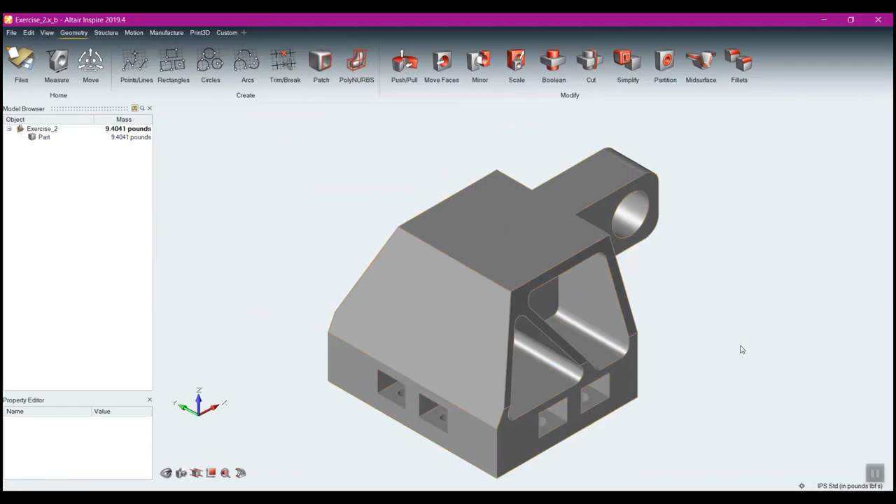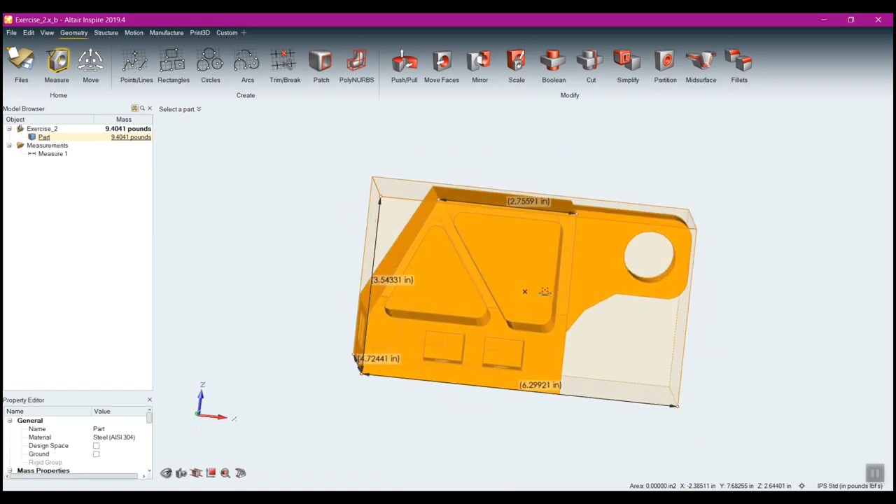I get the file in here like this, so I'll take a quick look around at it. Once I have it in there, I can do things like measure. If I want to measure a specific distance, I click on that and click 2 points and it will provide me that distance, or I can grab this box here, click the part, and it will create a bounding box and give me the overall dimensions for that box, so I can get an idea of the size of my part.

To get out of any function within Inspire, you simply right click and then take your mouse and pass it through this little checkbox and you'll exit the function.

Now, if I come over here, you see my measurement is saved. I'm just going to right click on this and delete it because I don't need that measurement anymore. But I'll take a look at my part, and you'll see my part says it's 9.4041 pounds.

How does it know that? Well, Inspire is going to automatically assign a material to that. And the material by default that it assigns is the material at the very top of our material library, which is steel AISI 304. We automatically assign a material so we can guarantee that everything is analytical.

But one of the first things I want to do when I do an analysis is make sure I assign an appropriate material. This part happens to be an aircraft door hinge bracket, so I'm going to make this out of aluminum.

To change the material, I can do that a couple of different ways. I can come here to the part and select from my list here. My personal favorite way is to right click on the part and select material. When I come down here, I can see a list of all of these different materials, all the way from steel AISI 304, down through plastic nylon. These are materials included in the software in our material library.

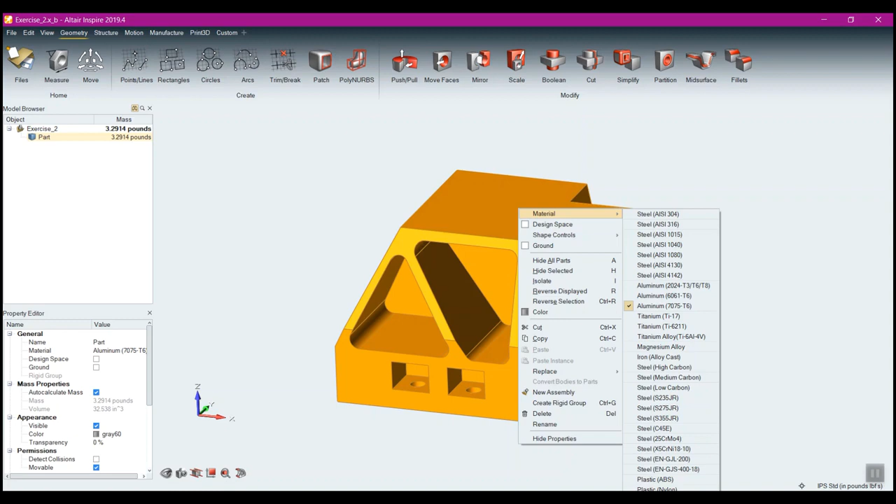But you may have noticed down at the bottom here, I've actually got a material called Douglas fir. I was doing some work on a part that I wanted made out of wood, so this is a custom material that I defined.

It's very easy to add a material to Inspire. I just come to my structure tab here, my structure ribbon, and come to materials. Once I do that, it's going to open this up. I've got 3 different tabs here. The first one is parts, which lists all of the parts in my model and their associated material. I only have the one part, and its material, of course, is 7075 T6 aluminum.

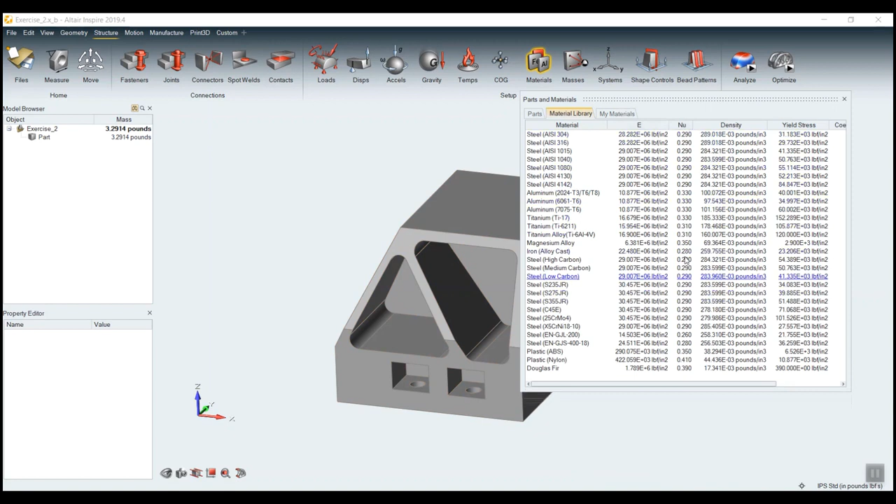Material library allows me to see all of the materials in my library currently and their definitions. And then my materials is where I can add my own materials.

You see my Douglas fir there, but I can click the plus and we'll add a special material here. It defaults to material 1, but I can click on that and rename it to whatever I want. So we'll call that... we'll call it something unique. Eric's material. There we go.

Now I just need to enter the values for that material. Since Inspire is a linear static analysis, we do require it be a linear material, so we're going to deal strictly within the linear range, defining the stiffness by the Young's modulus, the Poisson's ratio, and then the density so the mass can be calculated, the yield stress for analysis purposes, and the coefficient of thermal expansion, which is used if we're going to be using heat as a load.

Right now, the material does have to be an isotropic, homogeneous material. Unfortunately, we can't, as of yet, support non-isotropic materials, composites, that sort of stuff. That isn't to say people aren't doing analysis on composites using Inspire, but they're kind of homogenizing the material, taking the entire layup and coming up with an equivalent material specification.

You'll also notice here that my Young's modulus, which is a pressure, is being referenced in pounds force per square inch. That's being defined down here by my units. Units customarily have always been kind of a difficult thing when it comes to analysis. We've tried to make them as easy and seamless as possible within Inspire.

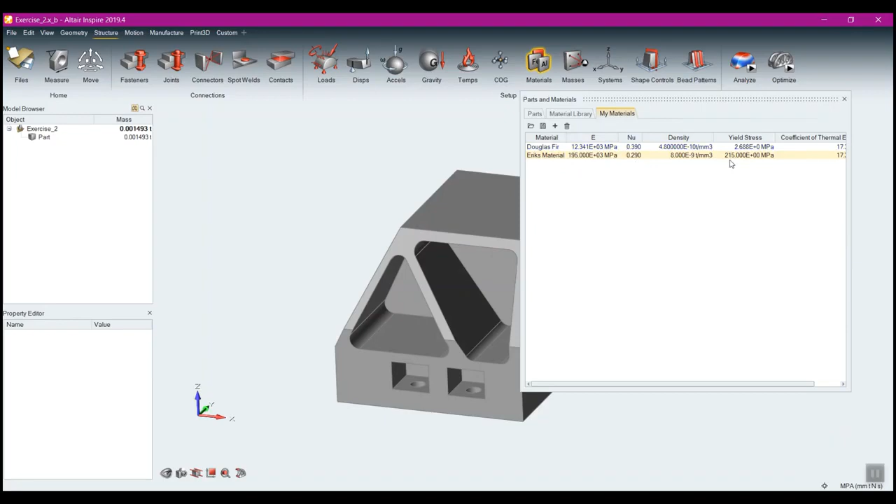I click that, and you see automatically my specifications have all adjusted to that new unit scheme. And if I come to my part here and take that same measurement I had before, you can see now it's showing as 70 millimeters.

The great thing about units within Inspire is they are entirely seamless. I can switch units at any point in time, countless times through working on the model, setting it up, analyzing it, post-processing it, and nothing happens to the model other than it adjusts to the new units. All forces, measurements, and material definitions will automatically update to the new units, so I don't have to worry about messing up my model. I can now just reference it in the new unit scheme. So units are truly seamless within Inspire.

Now I could delete that measurement, or as with pretty much everything with Inspire, it does have a display state, so I can click that and turn it off, and that still exists. It's just not being shown anymore.

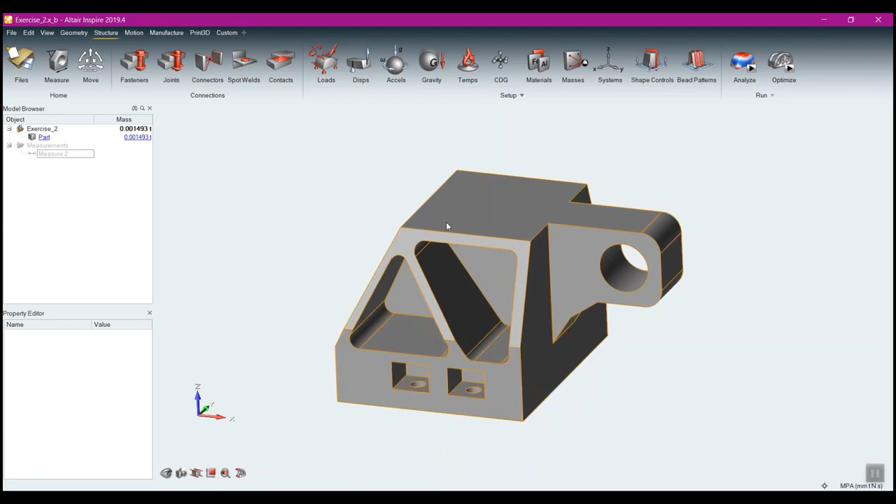So now I've defined my material, and you can see it's being shown in metric tons, so it's a very small number. Let me switch it back to English units here. So 3.2914 pounds. I want to run an analysis on this, a relatively simple structural analysis.

To be able to do this, I need to constrain it somehow or hold it in place. So I'm going to come back to my structure, come to my loads icon, which has a number of multifunction selections on it, and down here at the bottom we have the supports. You'll notice the icons within Inspire are large, somewhat colorful, and very descriptive as to what they do, achieved by combining functions through this multifunction idea. You can see my supports here are supporting this little block, so you can see what they're meant for.

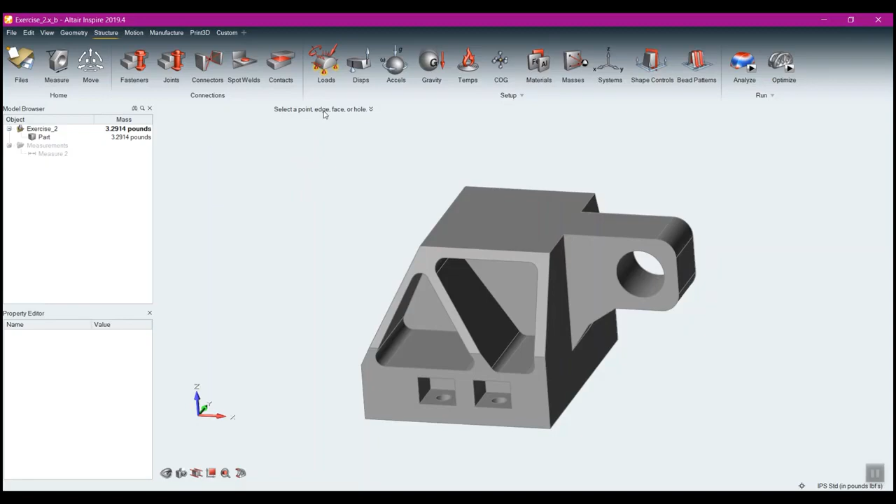When I select that, my pointer gets a little support modifier on it, and now I can select either a point, an edge, a face, or a hole. If I select a face, it doesn't matter where I click, the icon appears wherever I clicked, but the fact that the entire face turns red is what's important - it means the entire face is being held in place with an encastre constraint.

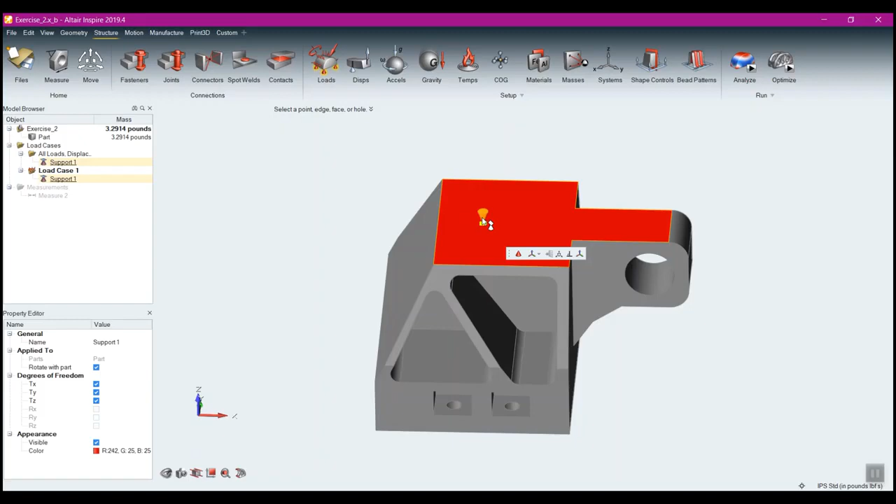There are times, though, where I don't want to fully hold something in place - I want to free up a direction or two. So I can just double click on that, and now you'll see I get these little pointers. If I select one of them, it turns green, and now when I right click to get out of this edit, my icon has modified to include these roller wheels, which show the direction it is now free to move.

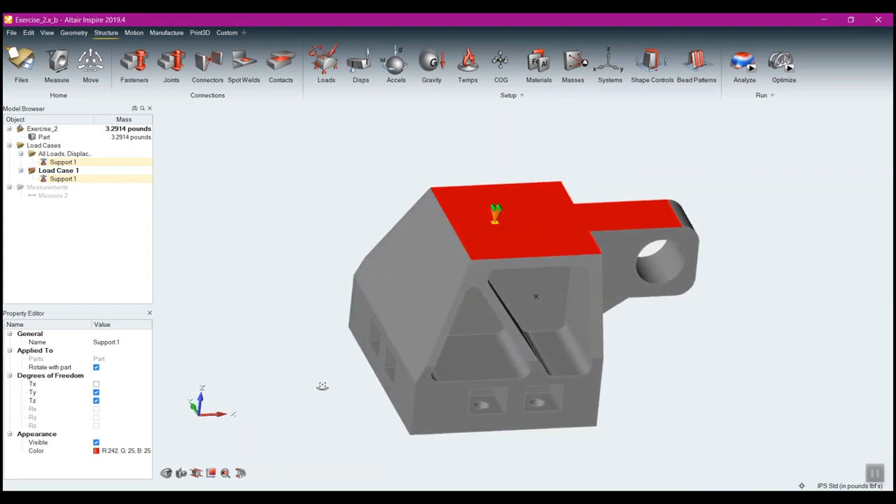So it is now free to move in what amounts to - what's that? Looks like the x-axis there. So now it's free to move in the x-axis.

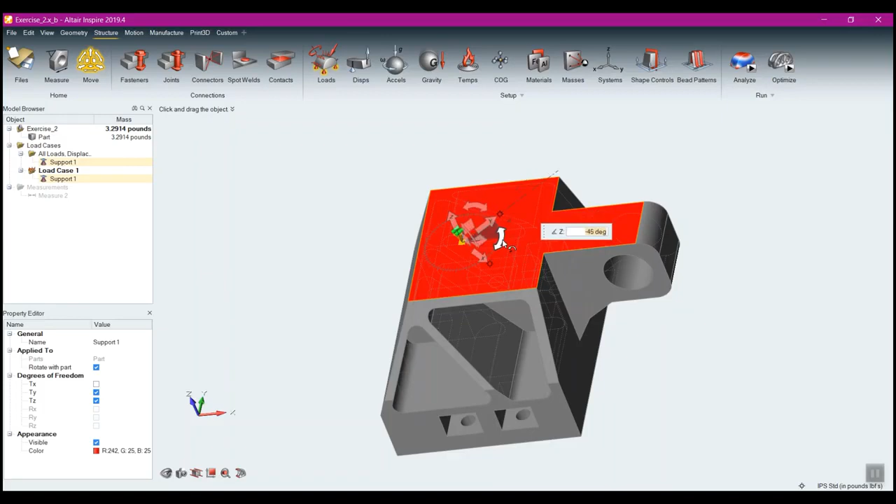These rollers are actually pointing in the direction, to the point that I can even come here and double click on this and select this little move support. I get my little triad with my spinners and translation, and if I spin that, I can spin it manually 5 degrees at a time, or I can type in a value. Now I'm 45 degrees off of the x-axis, and my little rollers are now pointing in that direction, so it truly is showing me the direction that is freed up.

If I double click on it again, I can select this one, and now I get a little caster ball showing that this is now constrained out of plane, but it can freely move in the plane. If I were to select the third one, it goes to a faded view because that is no longer doing anything. I can turn those back off again, and now I've got a fully encastre constraint.

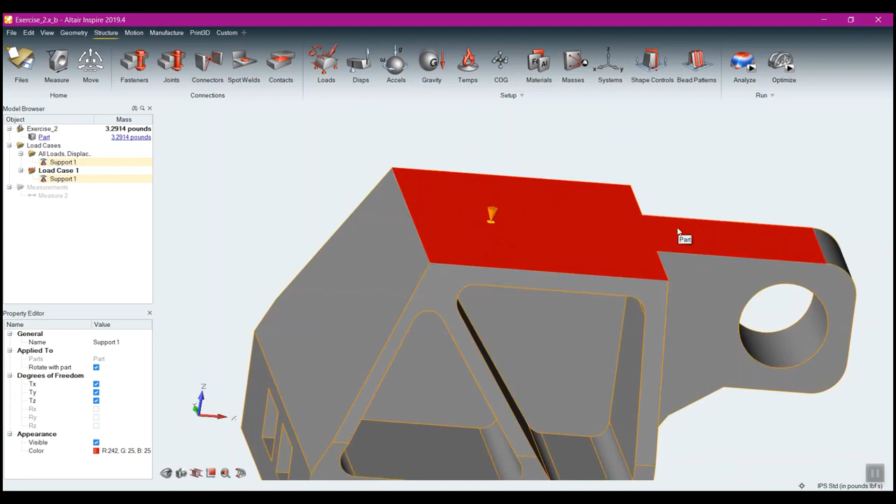In this case, though, I don't want to constrain that face. What I actually want to constrain are these bolt holes down here. This bracket is mounted onto the aircraft like this, and the door hinge goes through here, so I'm going to simulate mounting it onto the aircraft by constraining these holes.

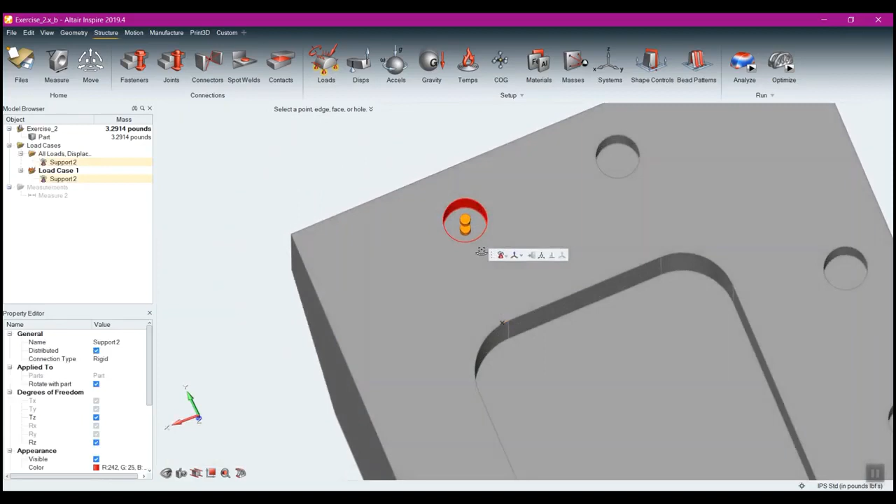So I'll come back to my constraint, select my hole, and I get a different looking constraint because Inspire does recognize that this is a hole, and recognizes that holes have some unique features when it comes to constraining things, because most of the time when we're constraining at a hole, we're putting a bolt or a pin through there.

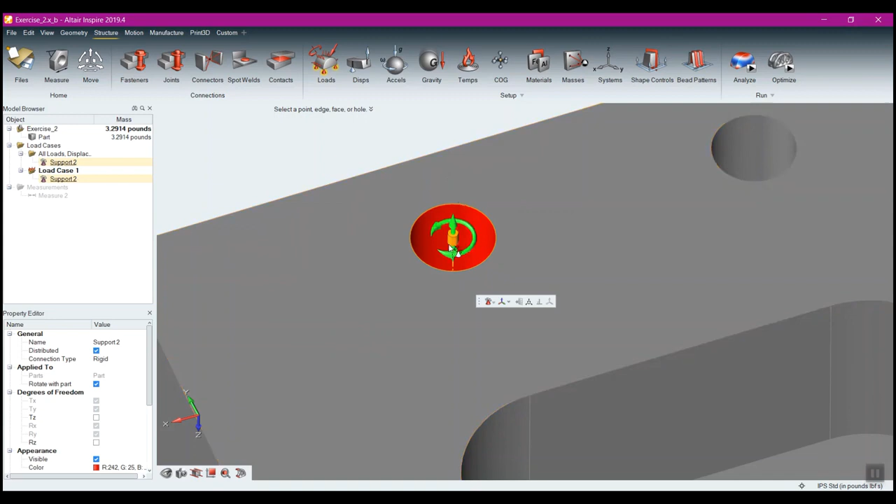So now if I double click this, I get slightly different features that I can free up. I get this kind of partial circle going around there, which if I select it turns green, and now that's saying this part can rotate around the axis or move up and down or along the axis, but it will always be constrained normal to the axis, acting like a bolt or a pin is in there.

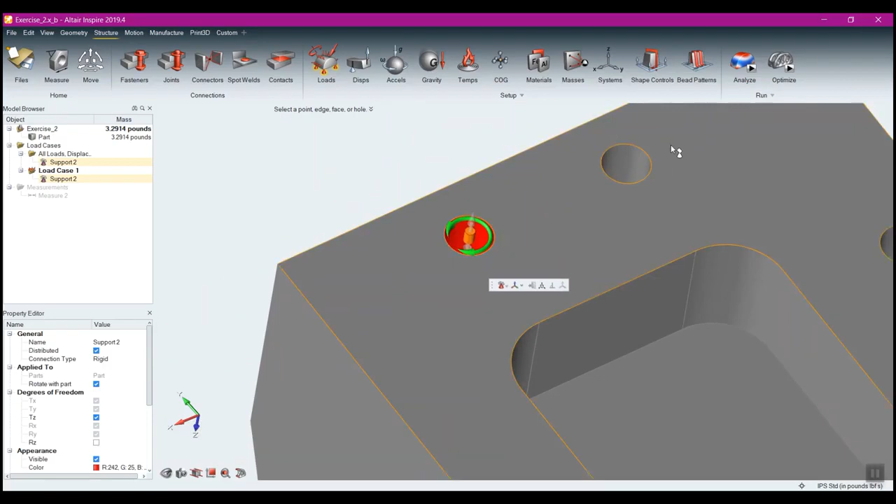Now, as a little trick here, I'm going to create all 6 of these. If I create one and then modify it while still in the constraint function... let me try that one more time.

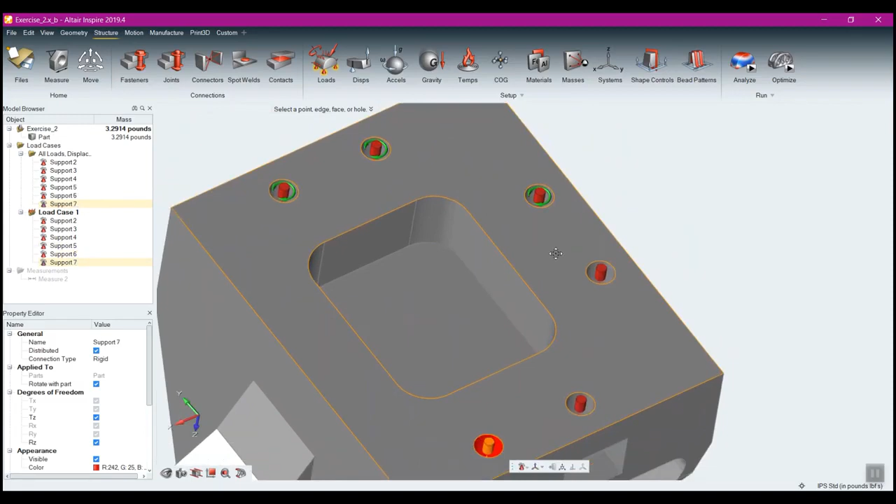Well, hey, sometimes even in demonstrations things don't work quite the way we wanted them to, but that's okay. So now I've created the constraints here. I actually didn't even want these freed up like that, I did want them fully constrained. But in the past it has copied that. Maybe that's a feature that's no longer there, but that's okay.

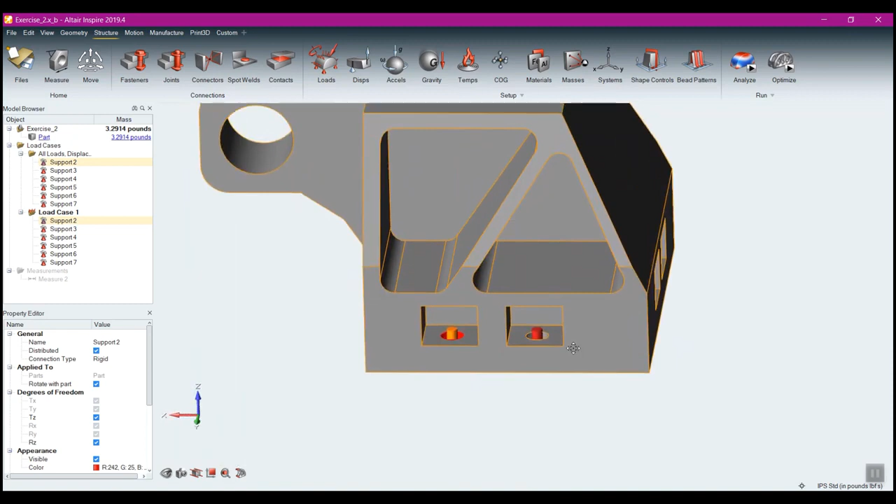So now I have my constraints in there, the part is held in place, and the next thing I want to do is add a force to it. I'm going to select my force, and again I can put a force on an edge, a face, a hole, or a point. If I select a face again, you see it says 1 pound force, and that entire face is highlighted in red.

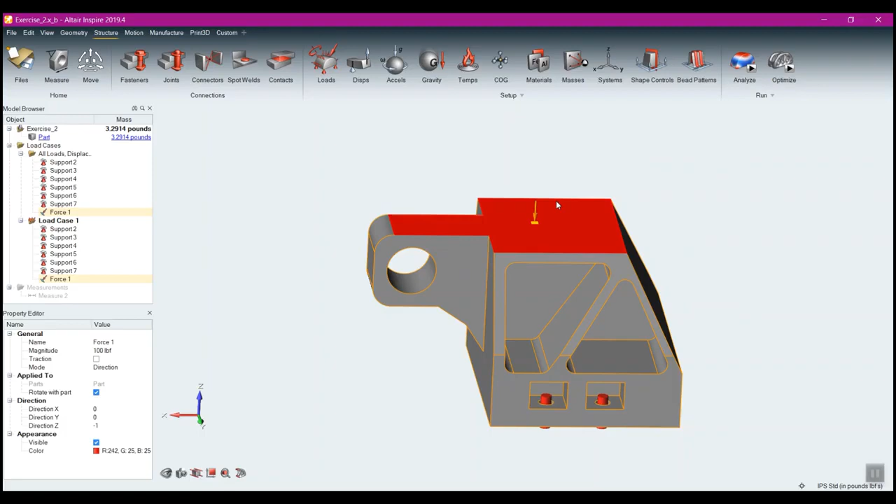That means this 1 pound force is going to be evenly distributed across that entire face. If I want to change it, I could say 100, and now it's 100 pounds force. You'll see when I highlight this, it tells me force 1 equals 100 pounds force, and then it even tells me what the equivalent pressure would be based upon the area of the face it's applied to.

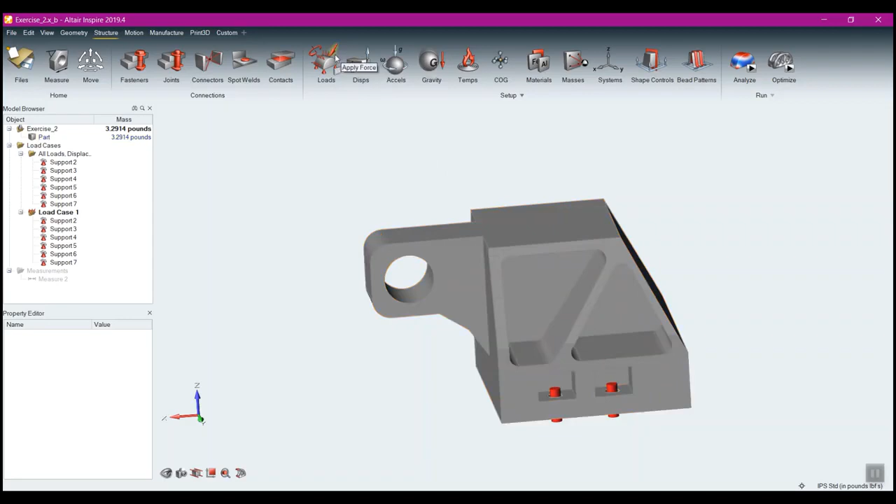So I don't have to worry about the placement on it. I just click on it and get an even dispersal and even spreading of that force across the entire feature, and that works also with lines. Points, of course, it doesn't spread it, it's just a point load, but it would on a line, or on a hole. If I apply it to the hole, which is what I want to actually do, I'm going to select that hole right there. It is now going to connect that to the entire inner cylinder of that hole.

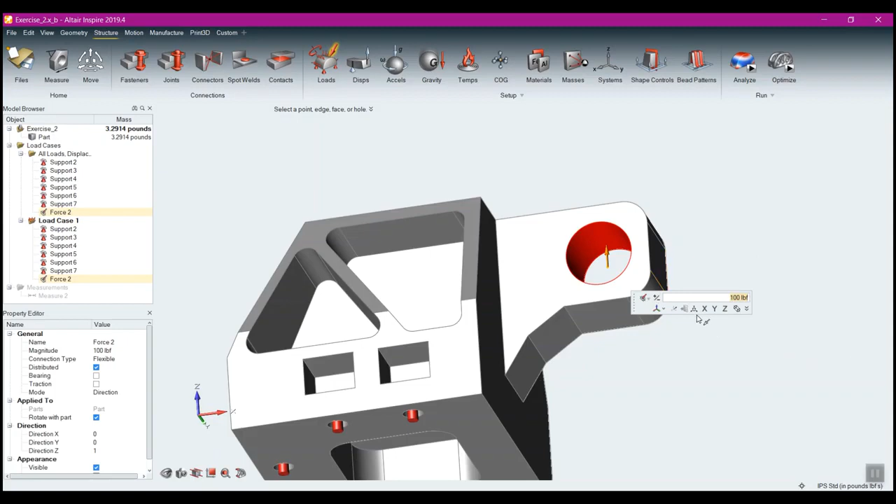And whatever direction I select here, either X, Y, or Z, it will point in that direction, and then I can do plus or minus. Just like I could with my constraints, I can come here and manipulate the direction with my little manipulators here.

Or if I happen to know the vector components of my force, I can put those in here. You'll see these are the components of a unit vector, but it does not have to be in unit vector form. I could say 3, 4, 5, and that will work perfectly fine, and that does not affect the magnitude. These are independent - this is just a direction vector, and I can specify the magnitude separately.

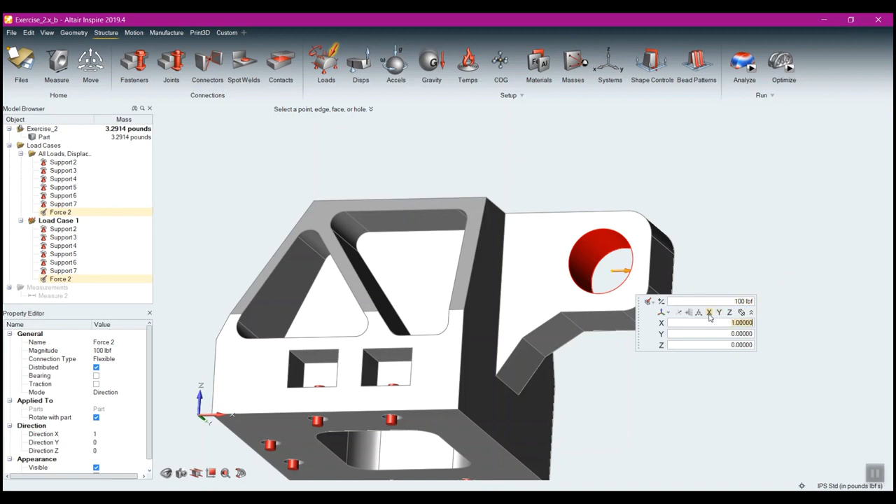Now here's a nifty thing. Let me first put this in the direction that I want. We'll put it in the x-axis. Nope, sorry, let's put it in the y-axis negative. There we go.

So right now it's 100 pounds force, and if I were to type in, say, 2,000, it would be 2,000 pounds force. But say, for instance, I happen to know that 2,000 newtons of force are being applied to this, and I don't have my calculator handy to do a quick conversion on it.

I can type in 2,000, and as we just saw, if I clicked enter, it would be 2,000 pounds force. But if I type the unit abbreviation N for newtons and click enter, it automatically updates that to whatever unit scheme or unit system I'm in. So I can even enter values in another unit system and it will automatically convert them, as long as I include the abbreviation for that.

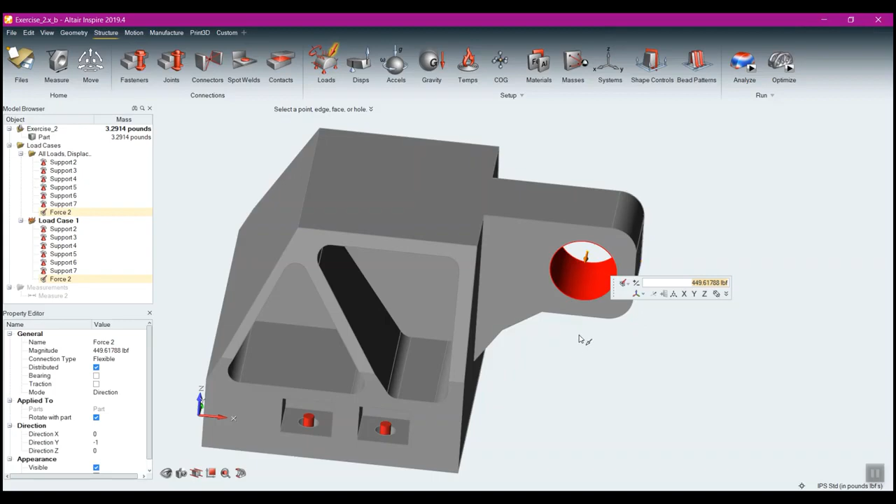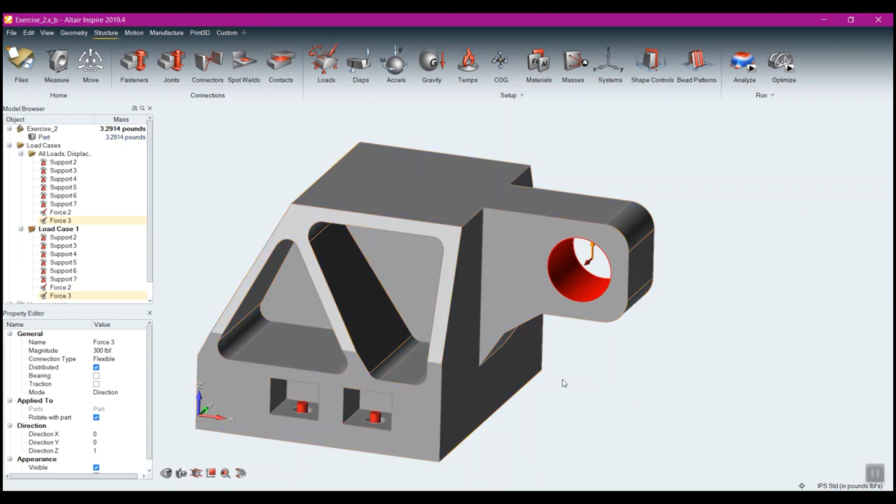Now I want another situation here, I want to study something else. So I'm going to put another force in here, and we'll have this one act in the z-axis, and we'll make this, I don't know, 300 pounds force. Really doesn't matter what value I put in there right now - of course I would want to know exactly what the values are for my load when I set up my analysis, but we're just doing a quick study here of how to set it up.

So now I've got these two forces: a 449 pound force acting this way, a 300 pound force acting up. The problem I have is both of those forces are going to act together, and I want to make sure these are two different scenarios that I'm studying.

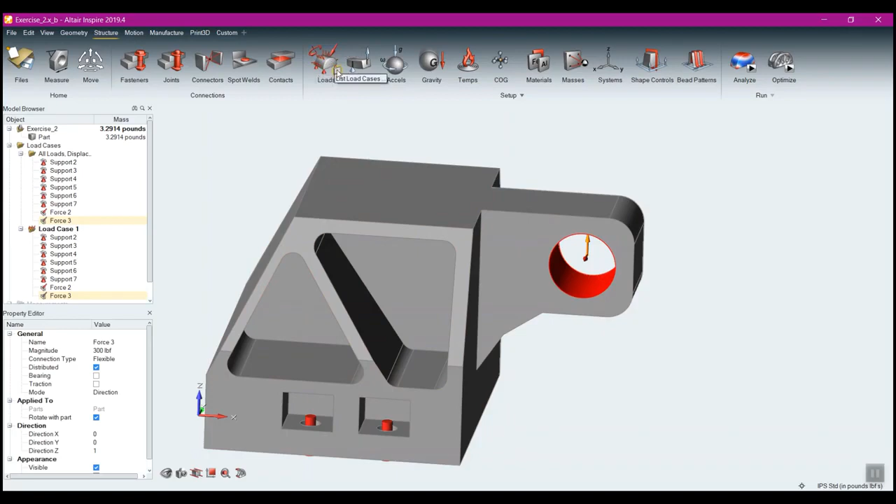So I can come up here, and if I highlight my force or load icon again, I get this list of load cases. I can add a new one, and then just pick buffet style what I want from there. So we'll say this one will be force 3, this will be force 2, and now I have two entirely separate load cases. I'll get results for both of them, run separately, but they'll run together in my analysis. I don't have to run two analyses, and I can add as many of these as I want.

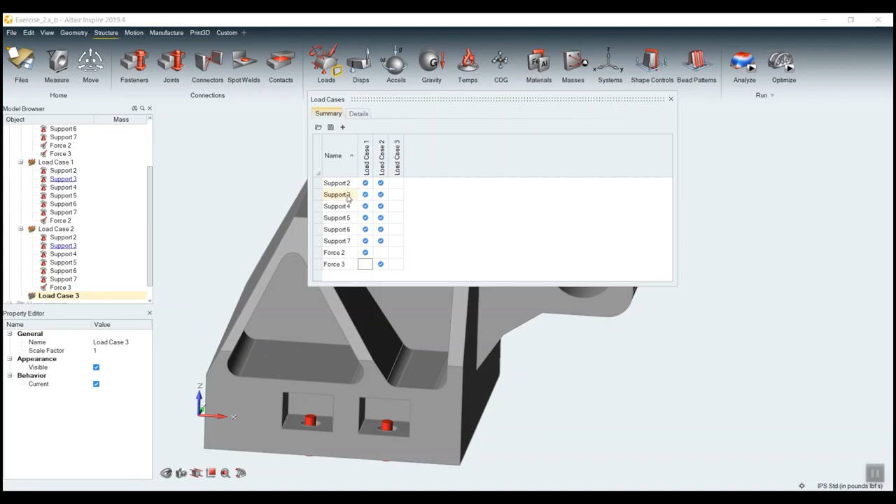So let's say, for instance, I want to simulate bolt 2 and 3 failing, so I'll just select the rest of these and force 3. Or I could say, wow, it's a particularly hot day, and I'll apply a temperature load on here.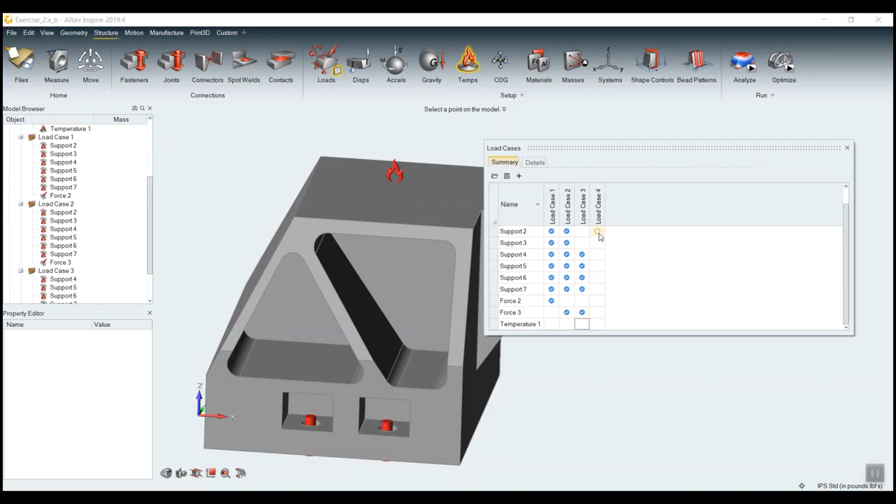And we'll say 100 degrees Fahrenheit. That is a delta T, so it doesn't matter what the temperature is it starts with, it's just going to deform based upon that delta T. Now I can add another one, so we'll say all the constraints are working, this force and this temperature, and now I have 4 different scenarios that I'm running. I can come here and rename these to whatever I want to make them a little more logical when I post-process.

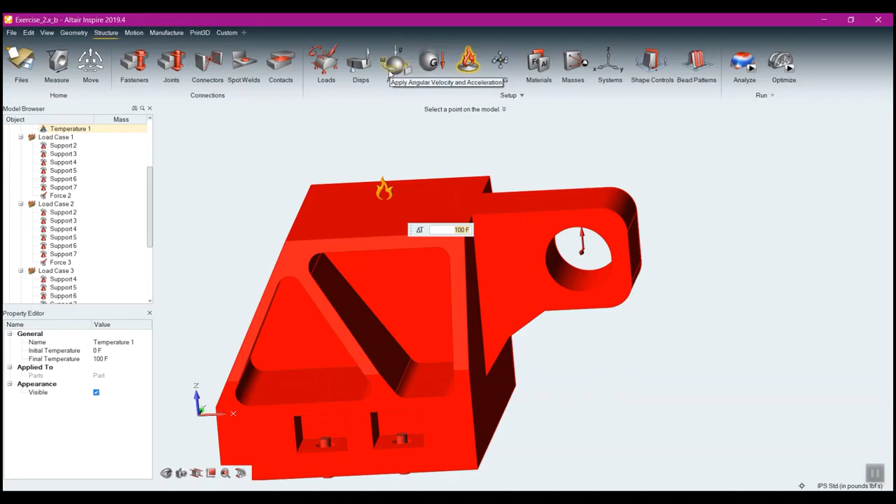Additionally, I can do enforced displacements. So I can say move this point, whatever it takes, move this point 5 millimeters, and see the stresses as a result of that. I can do gravity loading, angular velocity and acceleration. I can set gravity, so if I want to include gravity in my analysis or do G loading, I can set the direction and the acceleration for gravity.

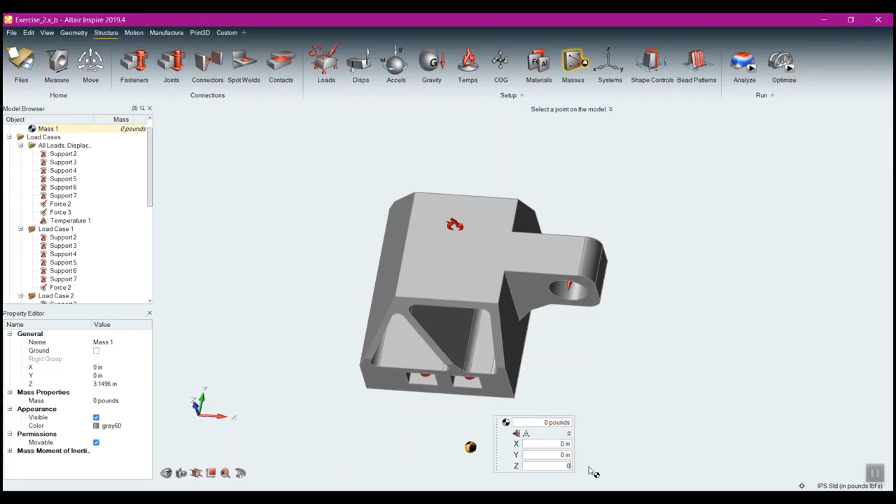I can even add non-structural masses. So say I wanted to analyze this with something hanging off of there, and I didn't know the force. I could put a mass on here, specify the mass of that, and then set the center of gravity of that mass, and it will move that mass to that center of gravity. Then I click this and attach it to my part, and now I have a mass hanging there, and it would analyze it as if this non-structural mass were hanging there.

So I have pretty much just about every way I could possibly want to analyze this, and I can get the results that I'm looking for. So I'm ready to analyze this. Everything is set up fine. I just come to my Analyze button.

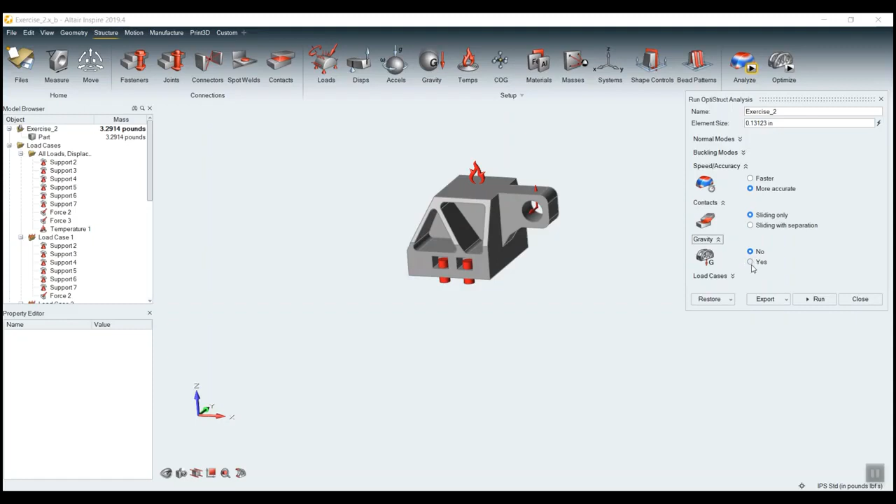We'll talk more about some of these other features here, normal and buckling modes, in another video. Right now, I want my result to be as accurate as possible, so I'm going to leave that. I'm going to leave my contacts alone, we'll talk about contacts in another video. Whether I want to incorporate gravity into my analysis or not, in this case, I'm going to leave it off. I don't need gravity. This is a relatively compact part, it's not going to have gravitational effects on it. And then I'll just click Run.

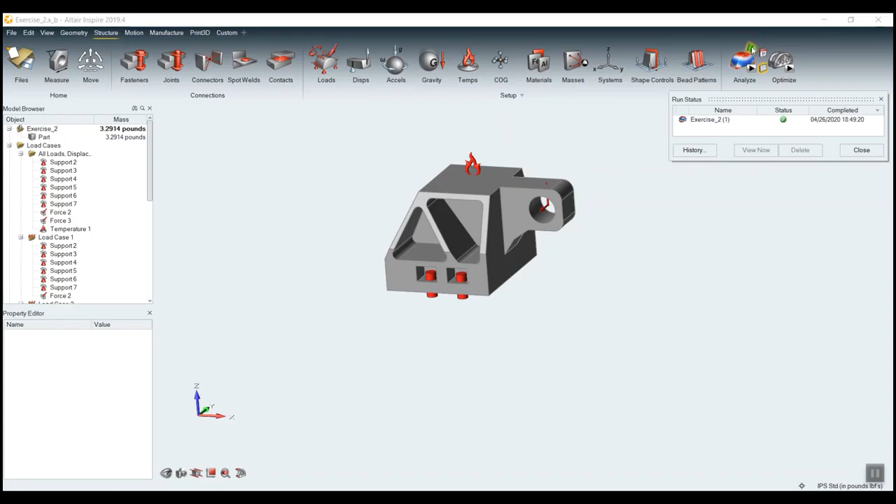Now this analysis will take just a couple of minutes here. It should run relatively quickly, and we'll pick it up once it gets done. So that took just about 2 or 3 minutes to run, and you can see as soon as it's done, we're treated with this little green flag above the Analyze button. And when I click that, it takes me automatically into the post-processing.

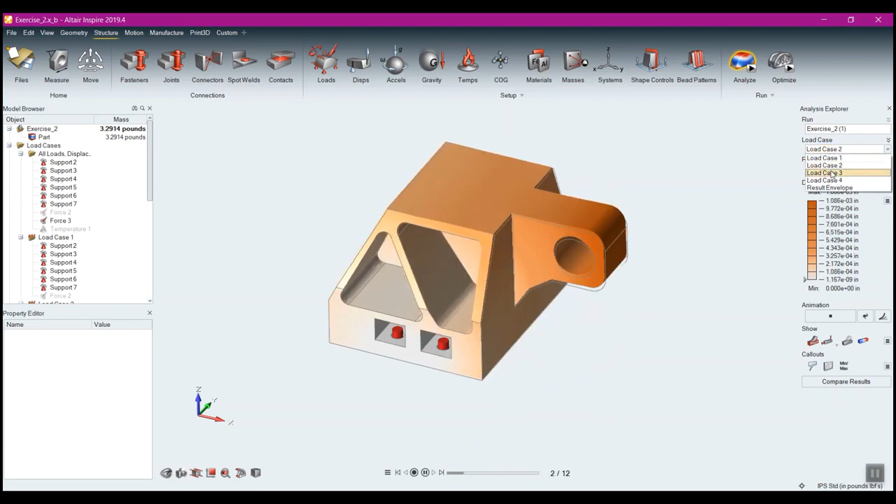Now we'll get into some of the more advanced features of post-processing. So we'll just take a quick look at the animation. We can see the behavior of that, and we can take a look at each one of the different load cases here, so we can see the different behaviors. So that's the one that's growing with the temperature.

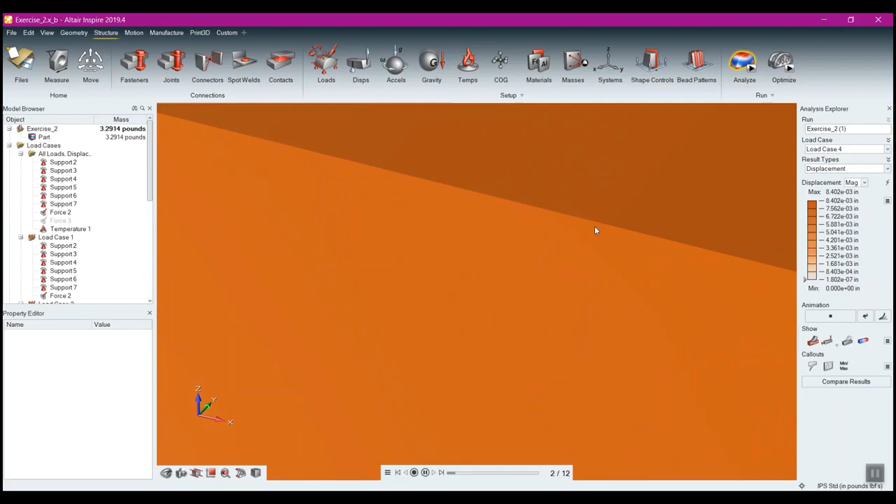We can indicate what we want to see, so I'm going to come down here. Right now I'm seeing displacement. Now these displacement values are actually correct, so these are the correct values, but our animation is very much exaggerated. If I come here to my displacement scale factor, you can see it's being exaggerated by 94 times. If I select 1, you really can't even see anything at all. In fact, I've got to really zoom in there to begin to see any sort of motion whatsoever. So we automatically scale that up for you so you can see the general behavior of it, but it's very easy to bring it back to a one-time scale if you want.

Come back down here, I can take a look at my von Mises stress in all of the different load cases. See, there's not a lot of stress there. And then take a look at something like factor of safety.

So we'll have an entire video on some of the features and the advanced features within the post-processing. But that's a real quick video showing you how to set up, run, and post-process a quick structural analysis within Inspire. Look for more videos covering some more features, and thanks for watching.